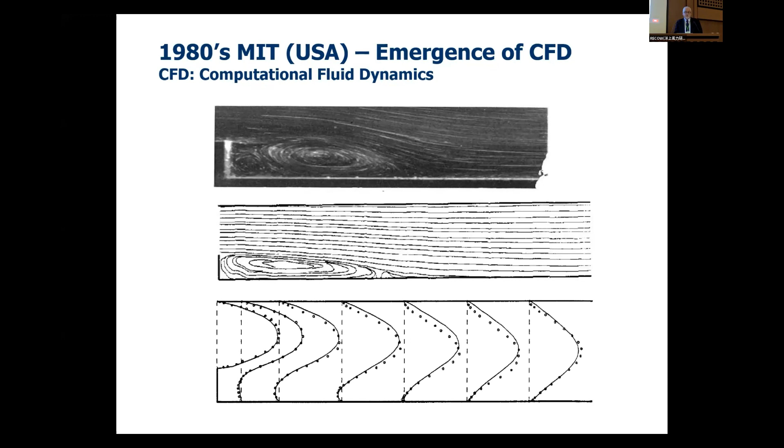When you look at where these experimental results came from, well, they were from here, from the Research Institute for Applied Mechanics, RIAM, at Kyushu University.

I jumped to the year 2000, which I would call the emergence of wind energy, large-scale wind energy. This is one of the first wind maps of the world, produced by DTU, the Technical University of Denmark. On this map, if you look carefully, you will see the Earth—North America, South America, Africa, Japan, and the rest of the world. Where it is black and dark on this figure means that the winds are the highest.

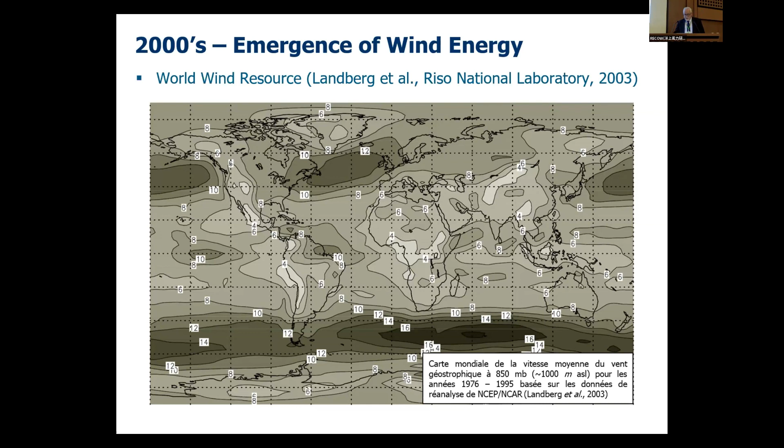Where are the highest winds on Earth where there is land? Well, it's basically here, around Northern Europe, where you see UK, Germany, Denmark, and the North Sea. Most of the wind energy currently is being developed in that region of the world. If you look elsewhere on the planet where there is land, the eastern part of Canada is quite interesting. But then after that, the best winds are right here in Japan, towards the north of Japan, but also including various regions of Japan.

So Japan, from these first wind maps, indicates that Japan has a good wind resource for power generation. This led to some of the work that we've done in my group in the 2000s, which we'd call the mesoscale maps.

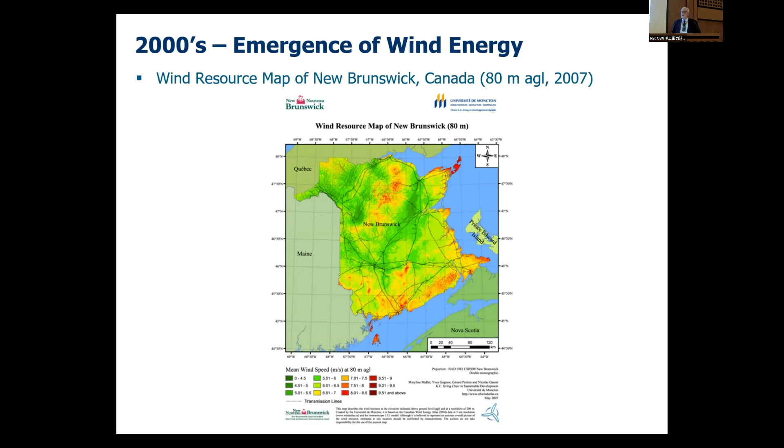This is my province, New Brunswick. It's about 300 kilometers by 500 kilometers. On those maps, the orange and red colors are regions where you can install wind turbines, not only to generate electricity from renewable sources, but also to make money out of doing it. So it's viable places to install wind turbines.

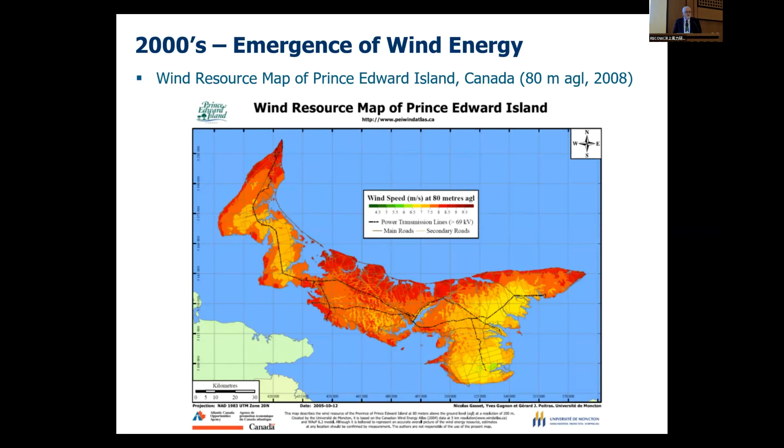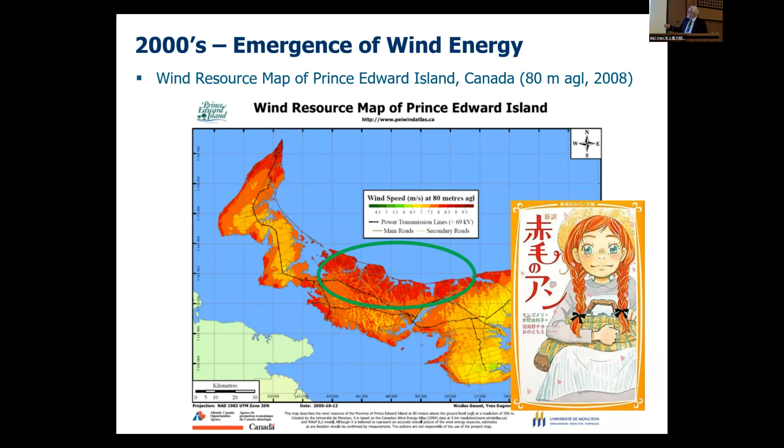Continuing in our region, we did what is called Prince Edward Island, which is next to my province. You see that on this island, you can install wind turbines almost anywhere without doing wind resource assessment, and the turbine will generate a lot of electricity. Now, for those of you who remember your school education, you will remember that Prince Edward Island is the land of Anne of Green Gables, and Anne lived in this region of the province which is highly windy.

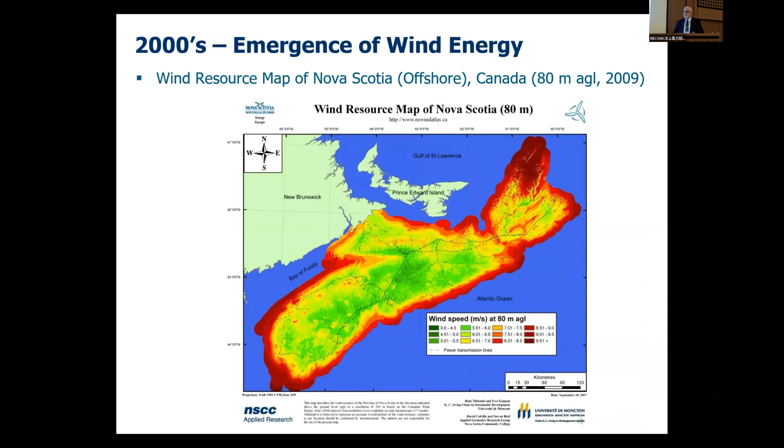We also did the province of Nova Scotia. Again, the highlands here are quite interesting—a dominant wind coming from the southwest. Then we did the offshore wind map of this province up to 10 kilometers. Right away you see that when you go offshore, the wind resource is much better, much more interesting for installing a wind power plant, but much more difficult because you're offshore.

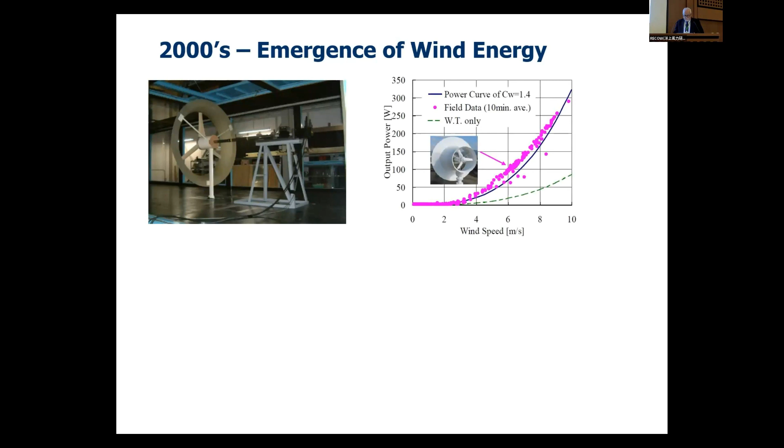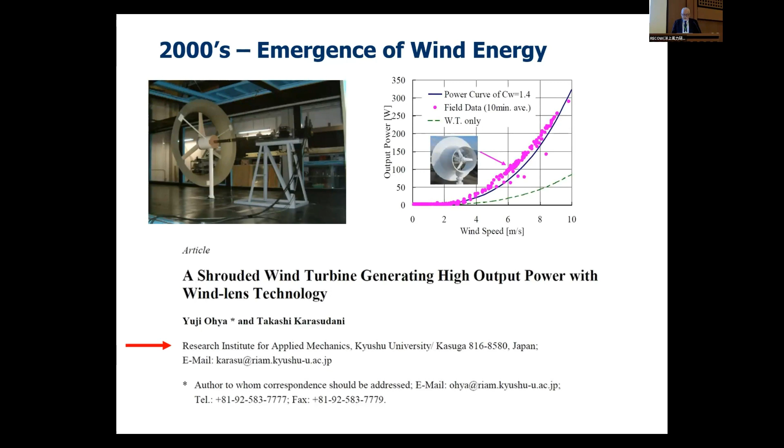Again, in the emergence of wind energy in the 2000s, we started to see some really interesting work out of Japan, and I present some of it here. There was many others, and we all know now that this was also coming from the Research Institute for Applied Mechanics, RIAM, here at Kyushu University—this work from Ohya Sensei.

Continuing in this line of the emergence of wind energy, in a similar meeting in Vancouver in the year 2006 or 2007, we had the pleasure to meet Ohya Sensei. He was part of the Japanese delegation in this meeting, and as you see, we have learned a lot from Ohya Sensei in the early phase of wind energy to help us develop wind energy in Canada.

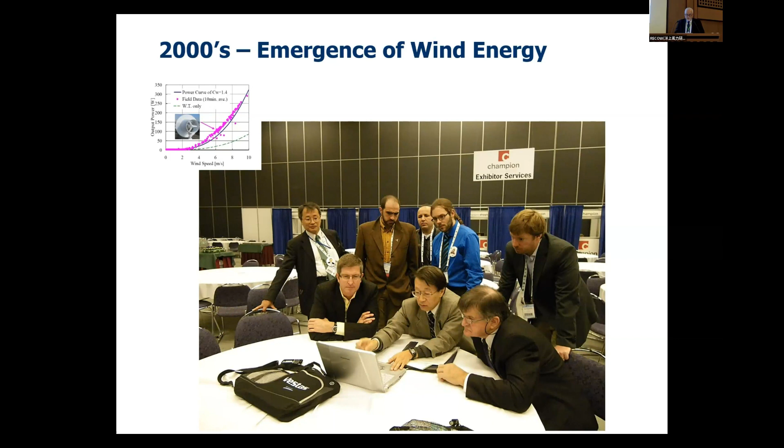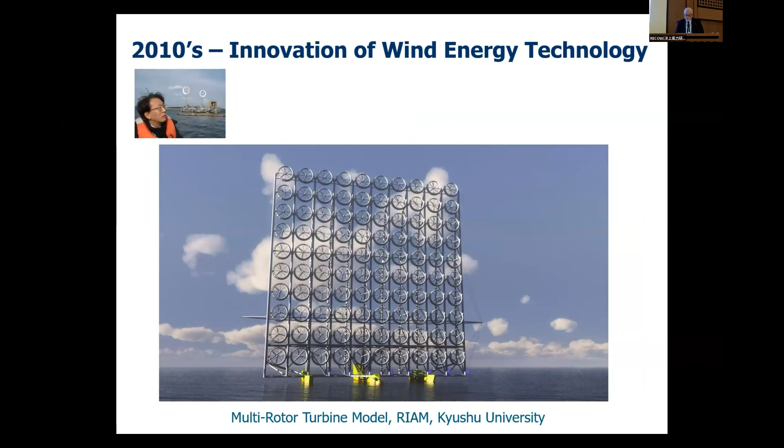And now we see innovation pushed even further with this type of multi-rotor turbine model here at RIAM, Kyushu University. We're still in the phase of innovation in wind energy, but I would say we're also in the phase of optimization.

To do optimization, we need to do a lot more finer and more complex modeling. So we start to see this type of work where flow simulation is done on complex, real in situ type of simulation. Again, this work is coming from RIAM, from the work of Uchida Sensei.

Continuing in this optimization phase, again the work of Uchida Sensei, very complex flow of wind turbines to understand the wake dynamics and wake interactions between different turbines. Many other great works here at RIAM, Kyushu University, from other researchers who are part of the institute.

So basically, the Research Institute for Applied Mechanics, RIAM, here at Kyushu University, is an important player, an important institution in the development of wind energy, not only in Japan, but also on the world scale.

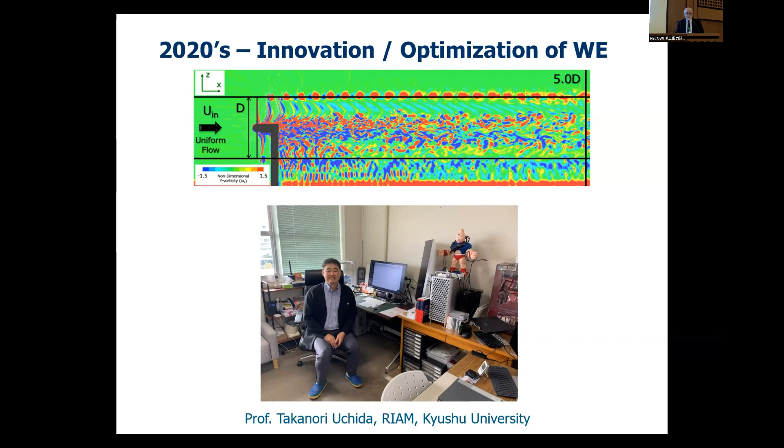I would say that RIAM is like the Ohtani of baseball. Ohtani was good in Japan, and he's also good at the international level. Kyushu University is the same, good in Japan, but also good at the international level. So it's a privilege for me to be a visiting professor here at RIAM. It's an honor to address you at this symposium here today.

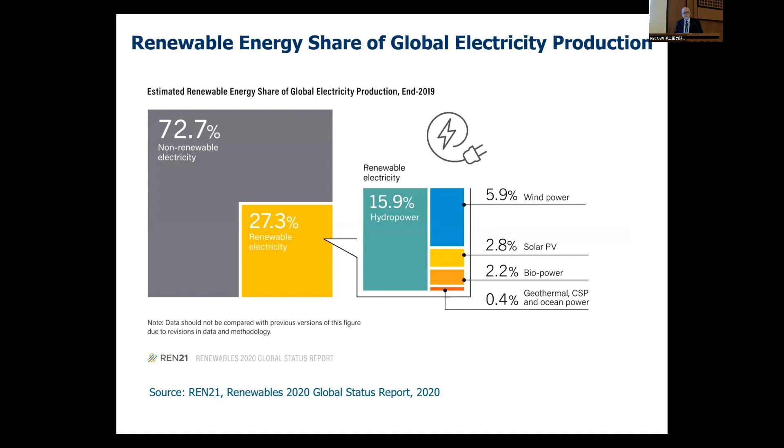We see that access to energy is not uniform around the world. Fossil fuel is part of the problem; renewable energy is part of the solution. Currently, about 70% of the energy in the world comes from non-renewable sources, mainly fossil fuel and nuclear energy. Roughly 30% of electricity comes from renewable energy, 60% from hydro, about 20% from wind and solar energy.

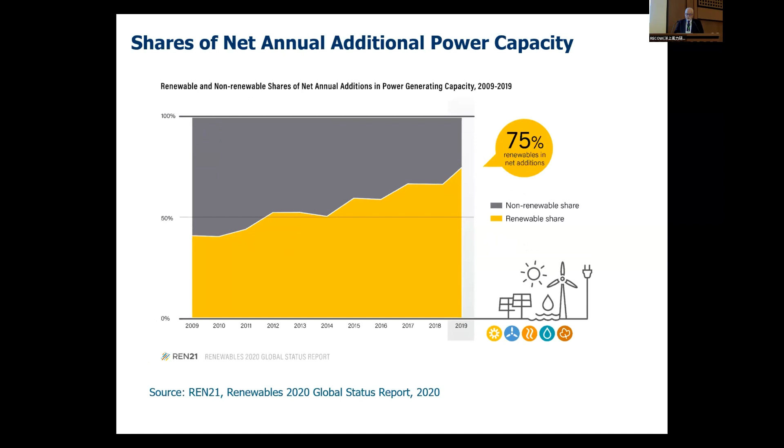What's interesting is that when we look at the evolution of additional power capacity installed every year, for the last about 10 years, more and more renewable energy is being implemented to generate electricity. Now about 75% of new power capacity installed comes from renewable energy.

Consequently, the investments are also for renewable energy. In 2022, the energy sector, the new power capacity sector, was $640 billion, that's billion with a B. A huge industry, about 75% of that coming from renewable energy sources.

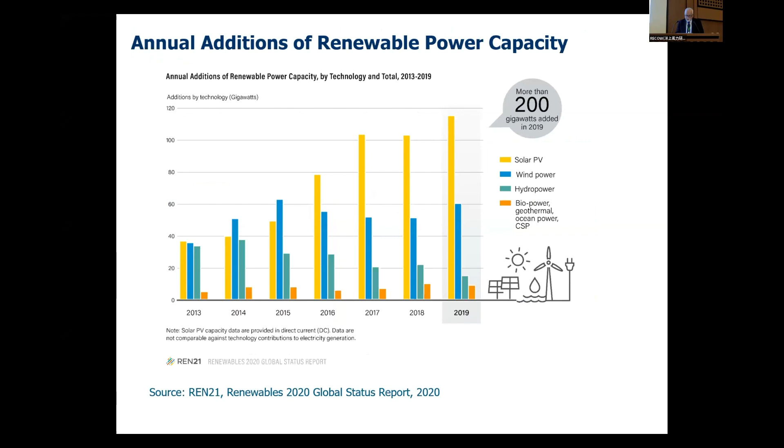Which renewable energy is being installed? Well, it's mostly solar, because of technical maturity but also cost effectiveness. We see that wind power, in blue, year after year, has a lot of installation being made, and hydropower decreasing in terms of installation capacity because of the lack of possibilities to install new large hydro dams.

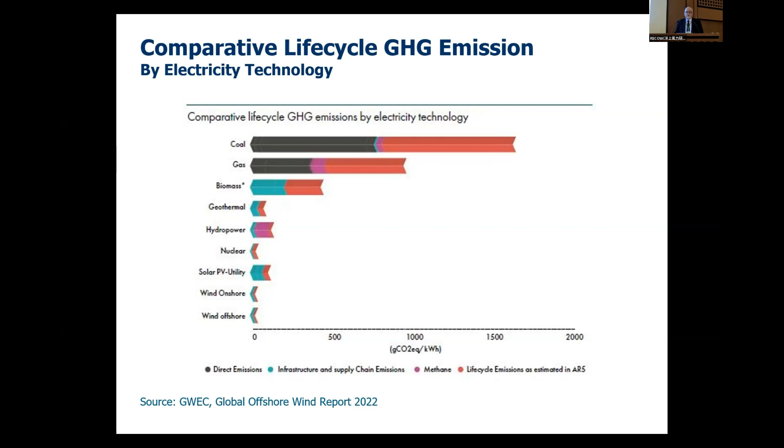Why is this happening? Well, essentially, when you look at the life cycle GHG emissions of the various different power sources, we see that wind energy, offshore and onshore, is the lowest emitter of greenhouse gas emissions in the energy sector. So this is the driver behind seeing so much wind energy being installed.

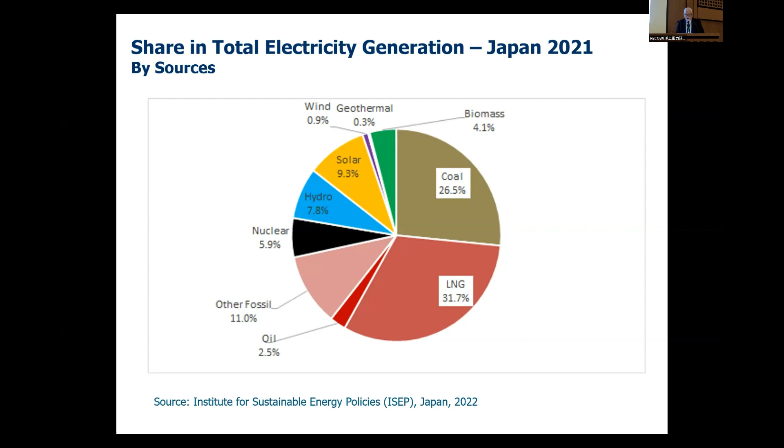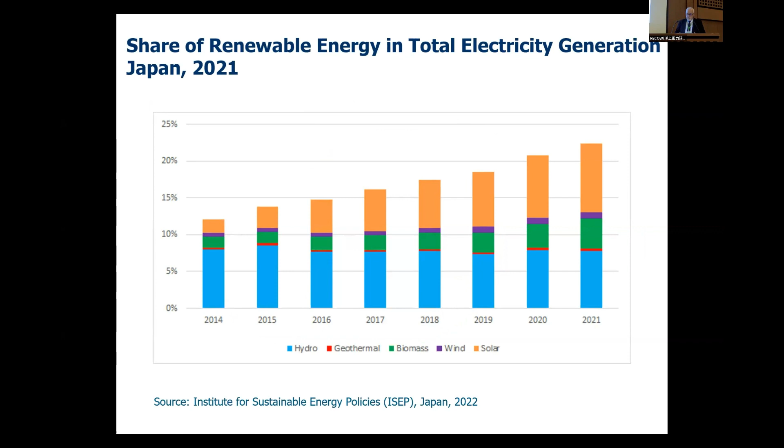But what's interesting is that the share of renewable energy in the total electricity generation in Japan is increasing year after year, mostly for solar, which is the orange. More and more solar is installed every year, and biomass is increasing a little bit, but wind energy is still not a dominant source of energy here in Japan. We'll come back to that a little bit later.

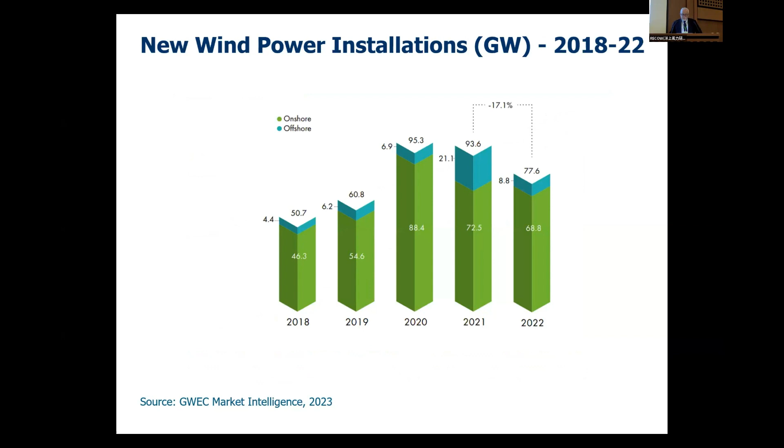In the last few years, we see the growth in more detail. Roughly 75% of the wind energy capacity installed is onshore, but more and more we see offshore wind power plants being installed. Where are these wind power plants being installed?

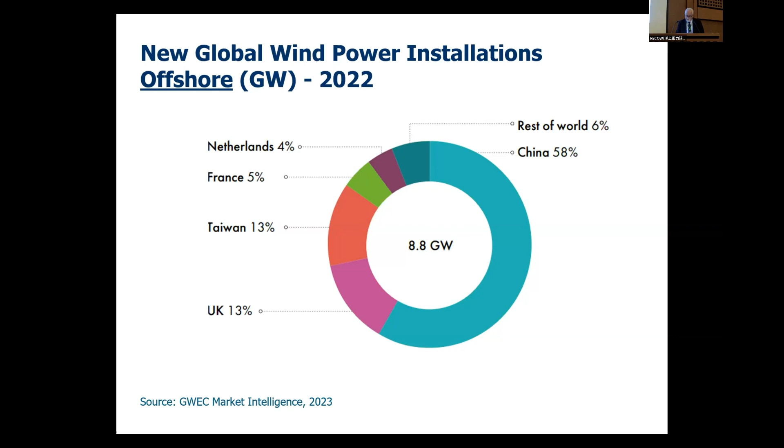In terms of offshore wind energy, in 2022 nearly 9 gigawatts, or 9,000 megawatts, of offshore wind energy was installed. About 60% of that was in China, about 13% was in the UK, and we see other countries looking at offshore wind power plants in their electricity portfolio.

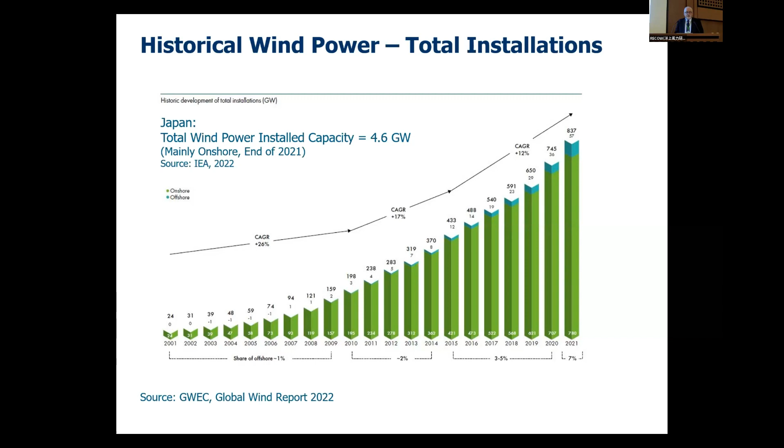That's why going offshore in Japan is quite interesting, and the future of wind energy in Japan is mainly as offshore power plants.

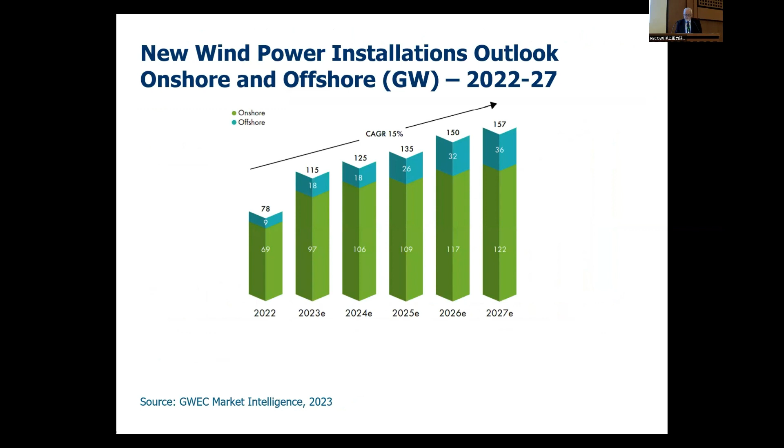In terms of the future, how much onshore and offshore wind power plant capacity will be installed? We see that more than 150 gigawatts of onshore and offshore wind capacity will be installed in the world, and about 36,000 megawatts of that will be for offshore wind power plants. So why is wind energy so interesting?

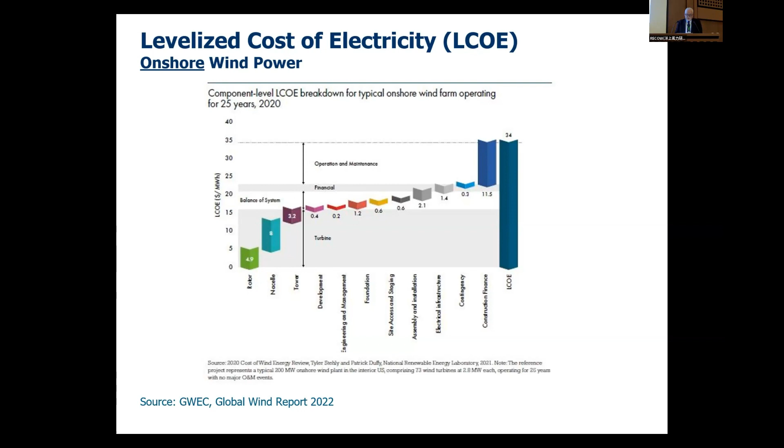Because the levelized cost of electricity is quite low, much lower than the retail price of electricity in various jurisdictions and countries. The LCOE for onshore wind power plants is about $34 per megawatt hour, and for offshore wind power plants it's about $77 per megawatt hour of energy.

Now, what happens once the penetration of wind energy is quite large, occupying a large percentage of the electricity portfolio? We have some models for that. Again, in Europe, Denmark has roughly 50% of its electricity generated from wind power plants, a combination of onshore and offshore.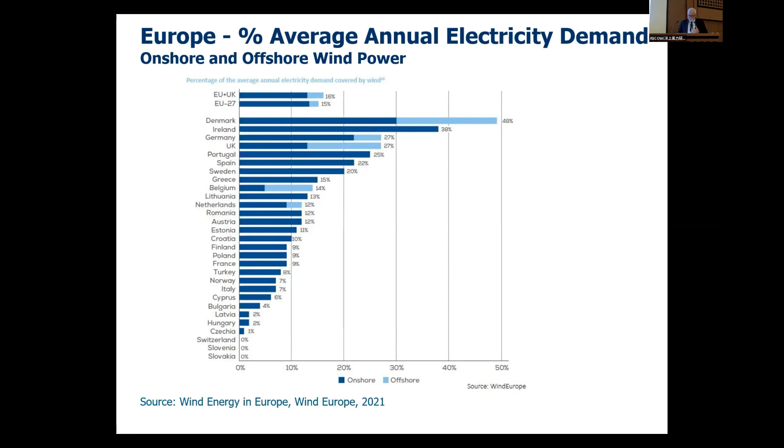Ireland is nearly 40% of its electricity from wind power plants, and Germany and the UK are at nearly 30% of their electricity coming from wind power plant, both onshore and offshore. So it is possible to integrate a lot of wind energy in an electricity portfolio, and the models we have are coming from Europe.

Same type of information, showing large installation capacity. Now, going to offshore wind energy, we've seen those nice pictures. We all know these pictures.

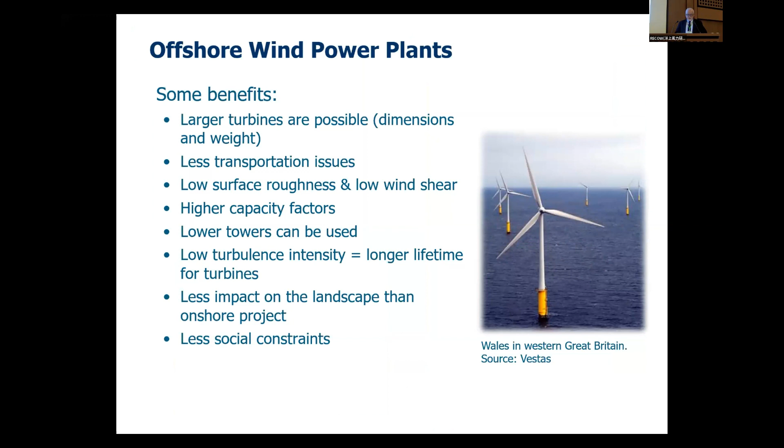The benefits of offshore wind power plants are much larger turbines, less transportation issues, low surface roughness, higher capacity factors, etc. I will also say less social constraint. But in terms of constraints, there's higher project and electricity cost, and there's the sea depth and the foundation.

So we have fixed foundations or floating turbines. It's also a difficult environment. For access, we need a boat. Onshore, we need a pickup truck to go there. Offshore, we need a boat. It's a salt environment, so corrosive, tidally affected. There's possibly ice, and there's the fishing industry also, which is a potential constraint.

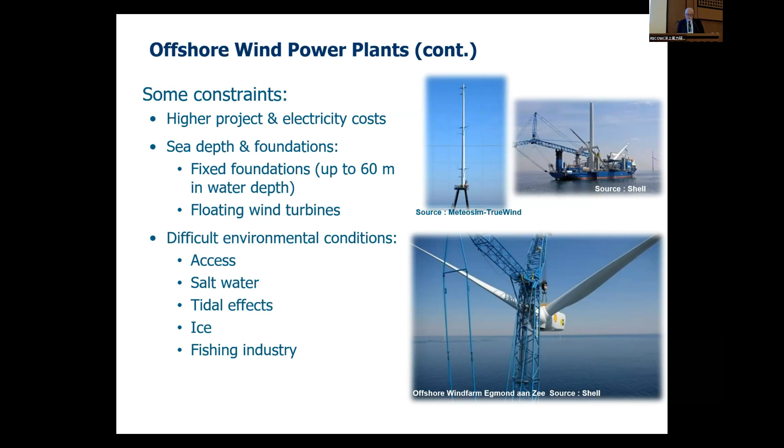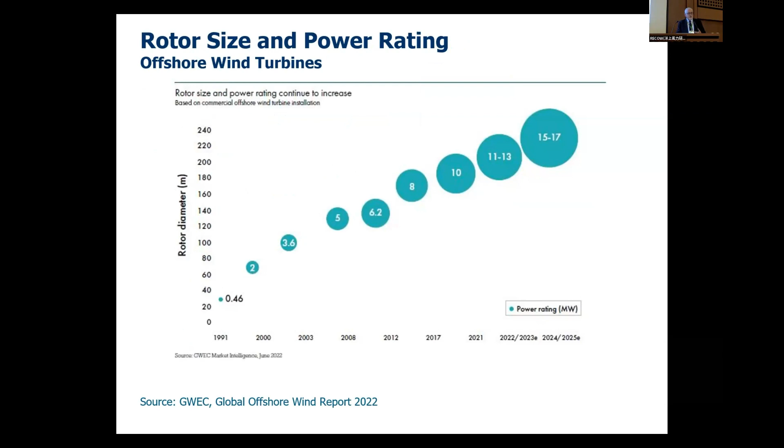Now, the rotor size of wind turbines is increasing. We've seen that, we've seen other people show this, so I will pass. Now we're in the 10 megawatt range of wind turbines.

There's various foundations. This is the graphical representation of those foundations: gravity-based and suction bucket monopile, in the order they appear in the figure. It's roughly 5% of the fixed foundation turbines installed. Most of the fixed foundations are monopile, about 80% of the foundations.

Here in Japan, there are offshore wind power plants, totaling 271 megawatt of offshore wind power plant. That's not counting the individual prototype demonstration turbines, but strictly the power plants with many turbines. So Japan has 271 megawatt of offshore wind power plant installed, and they are fixed foundations.

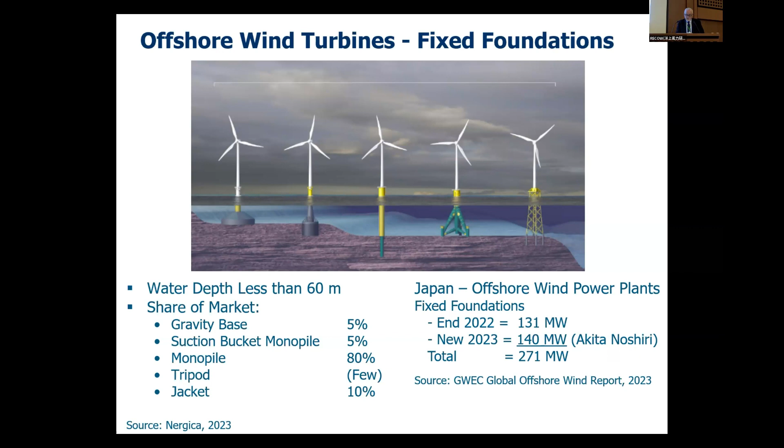Now, there's also floating foundations, which for Japan is maybe the future, or part of the future. Various types of floating foundations: spar submersible at 50% of what's installed currently in the world, spar buoy at 50%, and then other models like tension leg platform and barge type foundations.

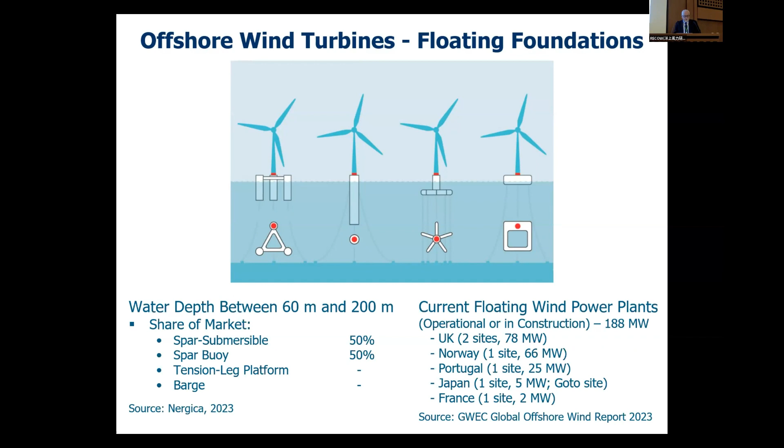Currently on the planet, there are 6 operational floating power plants or in construction: 2 in the UK, 1 in Norway, Portugal, Japan (a small one), and 1 in France. That's not counting the demonstration floating turbines, and Japan has a few of them. So we see that floating wind turbines are not a dominant player yet, only 188 megawatt of installed capacity.

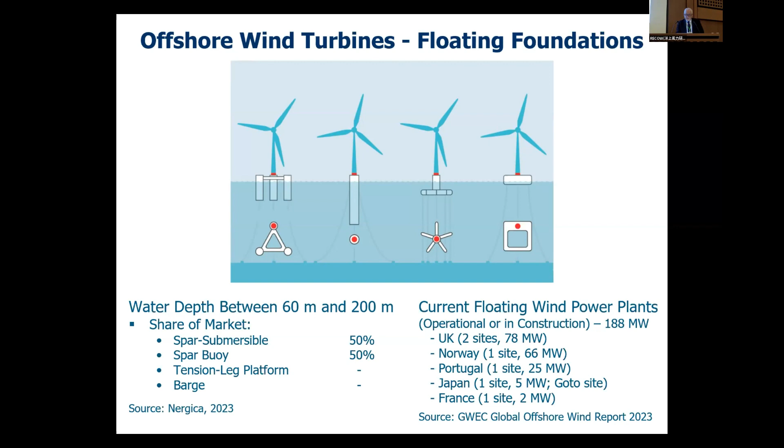We've seen those pictures of floating turbines. You know this maybe better than I do.

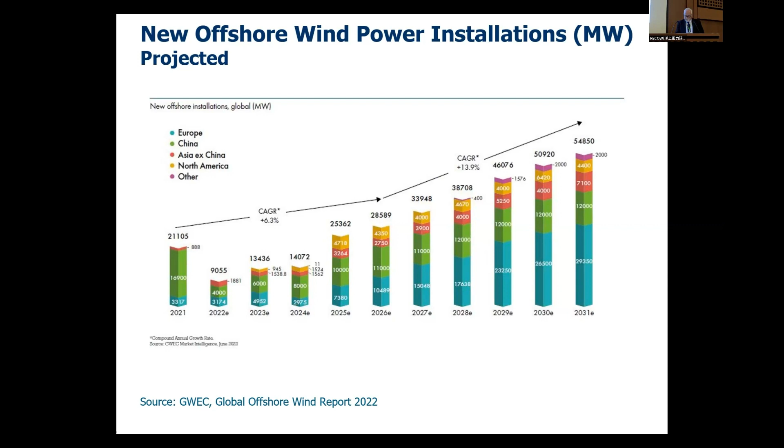Now, there's one essential condition when we want to develop wind energy, and that's good wind. So what's the wind here in Japan? This is a global wind atlas published by the World Bank, done by the Technical University of Denmark. On the scale, red and purple show wind speeds, annual average wind speeds reaching 10 meters per second—this is an exceptional wind regime. So we see that Japan is characterized by, at minimum, excellent, but I could almost say exceptional wind resource in the offshore region all over your country.

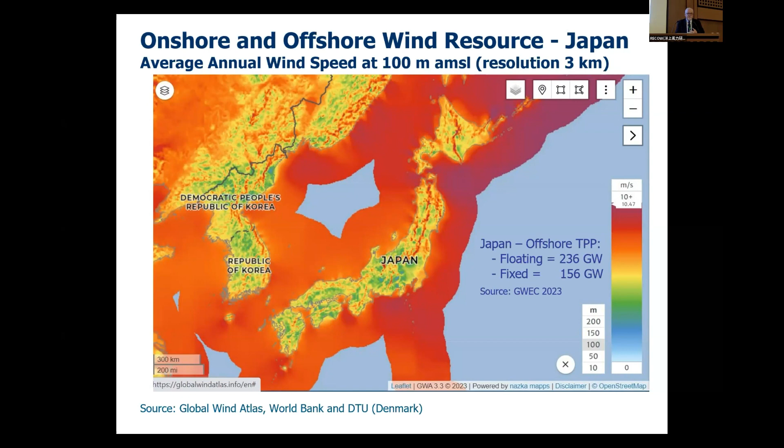So wind energy can be an important source of electricity for Japan if you can develop the offshore wind power plants. It's been quantified that Japan has roughly 400 gigawatt of technical power potential—much more power available in offshore wind than the objective Japan has right now, confirming that this 45 gigawatt of installed capacity is possible in Japan in terms of the wind resource.

Essentially, what I try to show you is that in terms of the world scale, we are still highly dependent on fossil fuel, but renewable energy is rapidly developing throughout the world, and offshore wind energy will become an important player in the energy sector across the planet.

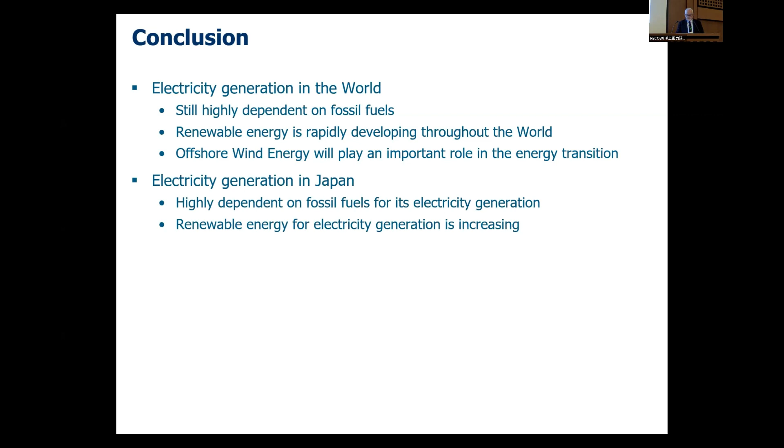Here in Japan, same as the world, highly dependent on fossil fuel for electricity generation, but renewable energy for electricity generation is increasing. In terms of the resource for offshore wind energy in Japan, you've got an exceptional wind resource, huge technical power potential, but you have a challenge: bathymetry, which is the opposite of topography, like topography under the water. It's challenging—you've got some important near-shore water depth.

There's ambitious policy objective, both on the short term, 2030, and on the long term, 2040. But you have advanced and world-class research institutions and universities. I spoke about Kyushu University, but there are others here in Japan. And you've got a robust and efficient industrial and manufacturing sector.

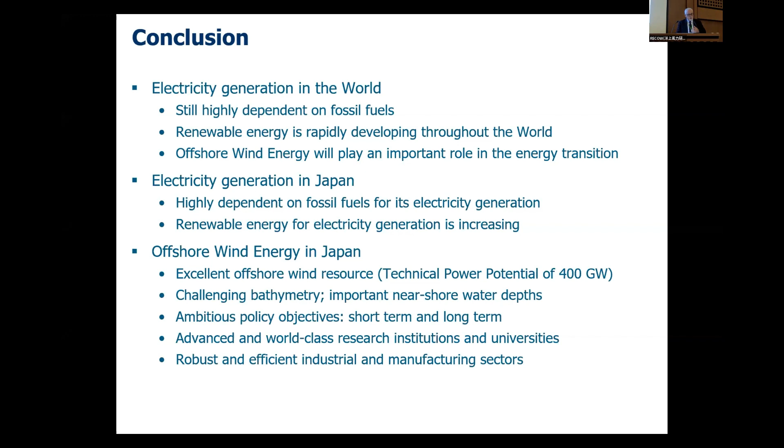So when we look at this, it's possible for Japan to achieve its objective. I remind you that I've shown in this presentation that in terms of the current offshore wind energy installed capacity, there's 57,000 megawatts of offshore capacity installed in the world, but only 276 here in Japan—271 megawatt of fixed turbine, and 5 megawatt of floating turbine. So a big jump to be made.

What does this mean? Well, if you want to achieve the short-term objective, which is 2030, you will have to go from 276 megawatt to 10,000 megawatt in 2030. If you divide that over 7 years, that's 1,400 megawatt of capacity that will need to be installed every year. So if you assume we are installing some 10 megawatt turbines, which is currently available, it means 140 offshore wind turbines per year to be installed over a 7-year period.

What this means is that today is Tuesday. If we assume a linear installation over a 7-year period, the first turbine must be installed this Friday, the second turbine next Monday, the third turbine next Thursday, if we want a linear scale of installation. So you see that there's some urgency to start installing wind turbines.

If you look at the long term, at the low end of the long term, which would be 30 gigawatt by the end of 2040, it means that between 2031 and 2040, assuming we reach the capacity of 10 gigawatt in 2030, it means 2,000 megawatt per year. And assuming again 10 megawatt turbines, this is 200 offshore wind turbines per year. You say, well, 200 is not too bad.

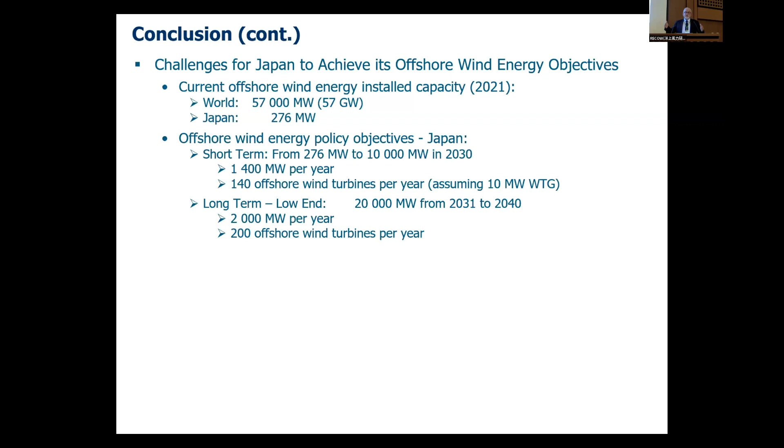Well, 200 turbines per year, that means one turbine every other day. So if we start the first turbine on a Monday, the Wednesday you need to install the second turbine, the Friday the third turbine, etc. Over a 10-year period, every 2 days you install a wind turbine of 10 megawatt and connect it to the grid. If you look at the long-term high end, 35,000 megawatt will have to be installed over a 10-year period.

And that comes down to 350 offshore wind turbines per year. So essentially, every day you will connect a 10 megawatt turbine offshore to the electricity grid. So big ambition, but it's possible.

But there are some challenges, and I summarize those challenges: research and innovation in offshore and floating wind turbines will be critical components for Japan to achieve its offshore wind energy objectives. So the research institutions and research universities must have some support to be able to develop this capacity, to feed this knowledge and create new knowledge, and do innovation to achieve those ambitious objectives for Japan.

It's well known that when you develop a new industrial sector, a new manufacturing sector, you need what we call in Canada HQPs, highly qualified people. So there's an urgent need to massively train HQP in wind energy here in Japan, both for onshore, but mainly for offshore wind energy application.

You need to develop a specialized manufacturing and installation capacity for offshore and floating wind turbines to be able to meet those objectives, the short-term and long-term objectives of the country.

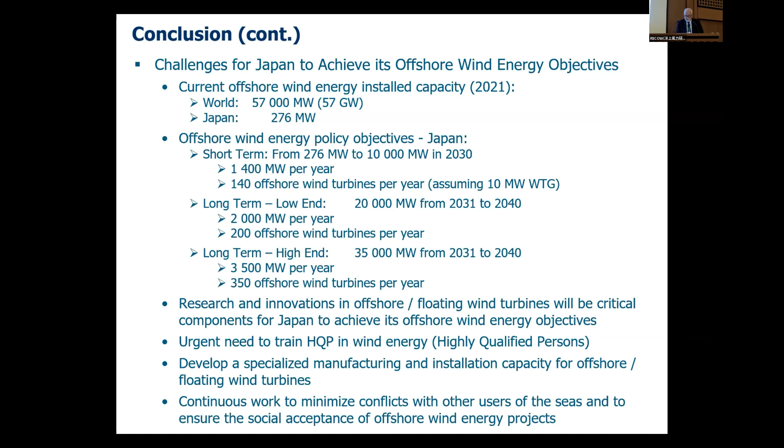Sorry, I took maybe a little bit more time, Mr. Chairman, but this is what I wanted to talk to you about, and hopefully in 10 years or 20 years from now, there will be much more light on this planet than what we see here today. Thank you very much.